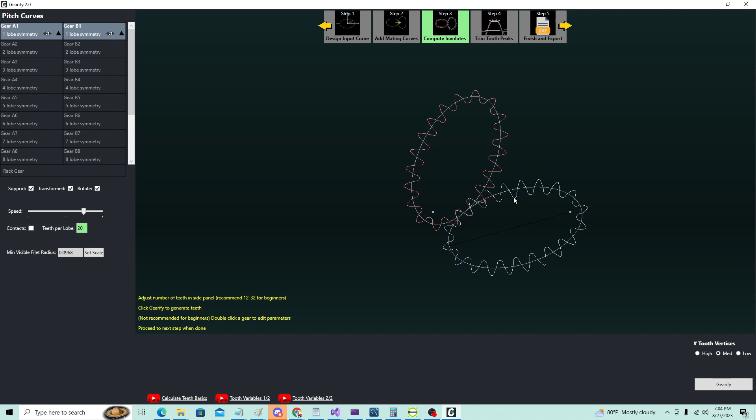But one thing I'm going to want to control for is, first of all, I want the gear to be the appropriate size, and I want to also make sure that the interior radius does not fall below that 0.05 radius dimension, so that you can mill it with the minimum end mill size that I have available. So I need to set the scale of this thing effectively before I can actually read or understand or make sense of any of the dimensions.

So I click Set Scale, and I'm going to use the default, which is the Ref1 to Ref2 distance. So basically that's going to be the axle to axle distance, and I want that desired dimension to be 3 inches in my case. Now, dimensions in Gearify are always unitless, so I'm just going to make it 3. And then I click Scale to Dimension. Okay. So there are different numbers of teeth I could use. The other gear assembly used 32 teeth total.

But notice now that I've actually set the scale, I can actually read this min radius dimension, and it's actually correct at this point since the scale has been set. Now that's too small. So basically, if I make it the same number of teeth as the last design with the axle to axle distance of 3 inches, it's falling well below my 0.05 minimum for the interior radius, because you wouldn't be able to get an end mill into these interior corners. It would just cut away too much. It would not accurately capture the design.

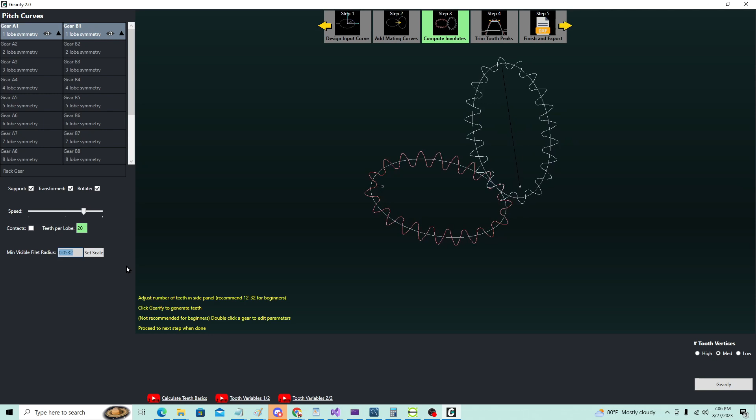So what I want to do is I want to increase the number of teeth so that each gap is larger. And I think actually 20, which was the default, may be a good value to shoot for. And it appears that it's correct, that 0.053, so we're above that 0.05 margin. So already it looks like we're in pretty good shape. So let's proceed, just sticking with all these defaults.

Let's proceed with the default parameters, and I'll try the trimming step because we gotta get rid of these interior intersections now. So I'll leave it at the fast setting because that's really good for prototyping and also for demonstration purposes. Probably would use standard if I was actually gonna produce this exact design. Now that looks pretty good, but there's a small problem.

Notice how the tips on the pointy ends were seriously clipped off, like massively clipped off, and the flatter end teeth not so much clipped. These are kind of more pointed, and these are kind of much more blunted, and I don't like that. First of all, I don't like it aesthetically, but also operationally I don't like it, because if you watch those, so I have the show contacts here, these green dots.

If you watch that right about this point here, you can see that here we are, right there. You see that brief moment, and I think it'll happen again at this point. Slow it down a little bit. You see when that point of contact drops off there. Now I have just one point of contact between the two gears, which is not good. I want at least 2 so that it's pinched and that it doesn't slip out.

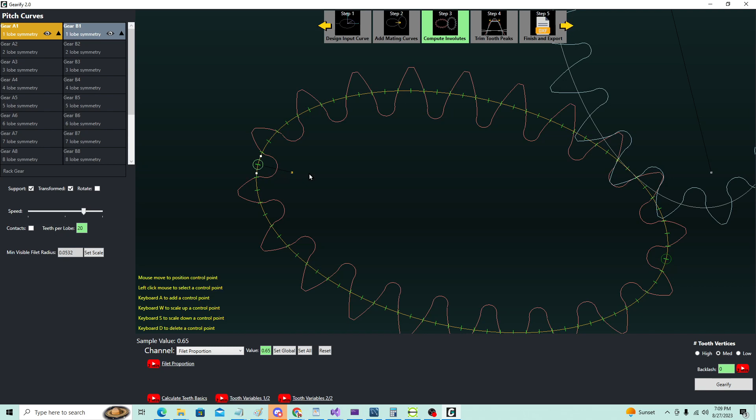So I'm going to use a fillet proportion of 0.65 instead of the original 0.5. Say set global, and then click Gearify again. And notice how those depths now increased after I changed the dimension and Gearified. Now I have a deeper cut there. And that's all well and good, but honestly, I really only need the deeper cut on this side. The cuts got a lot deeper on this end as well, and I don't hugely love the aesthetic. I'm fine with how it looks over here, but over here, this is superfluous because I already had plenty of clearance. So how do I handle that?

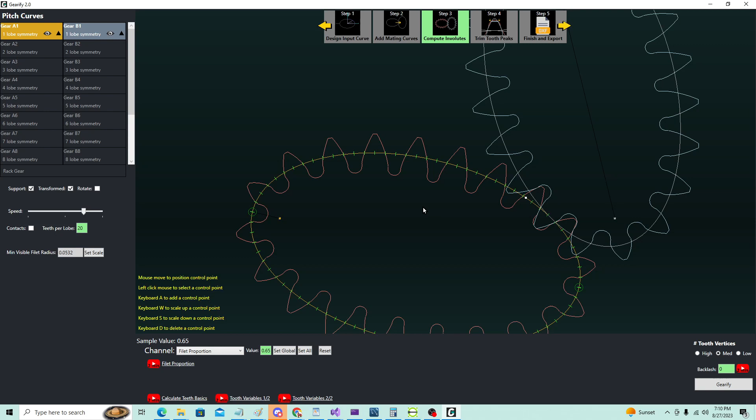So what I'm going to do is I'm going to add a control point here. I'm going to add a variation to it. Instead of being uniform, I'm going to control that fillet proportion. So over here, it's 0.65. Here it's 0.65, but I just added another control point, and I'm going to reduce that control point down to 0.5. So now if you look at that sample value along the curve, that fillet proportion varies from 0.65 on the ends to 0.5 here.

And I'm going to do the same thing with the other gear. I'm going to add right in the middle there, just add a control point. I'm going to reduce its value to 0.5. So then we've got that nice smooth variation. Okay, so if I did this right, when I click Gearify, you should see, if you watch right around here, you should see that jump in and be a little more shallow after the calculation. Perfect. Okay, yeah, it worked exactly as intended.

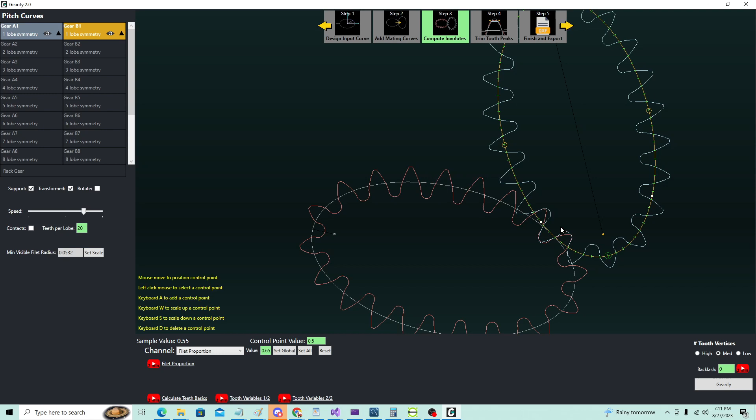All right, cool. So I've made these interior fillets deeper, so hopefully I get less shearing of these tooth tips at the pointy ends. So now that we're good on that, I'm going to say begin trim. And it does look a lot better. See, with the trimming, we have a lot less blunting of the tooth peaks. So much better, at least aesthetically.

But let's examine it now and see, actually, are we still getting enough contact between these tooth tips? And I'm going to just kind of roll this forward, and it looks like there might be trouble. I'm not sure if this is going to pass the test. See, we've lost it. So now we only have one point of contact right here. And even though that was significantly better, we have a lot less truncated tooth peaks, we're still missing some contact in that region back here. You can see when it drops off again. Yep.

Yeah, it's just not quite enough. All right, so now what do we do? Okay, we've improved the aesthetic and we've definitely made a little bit more clearance, but we're still not quite getting as much contact as we would want. So let's tweak the parameters again. You see when I go back, the trimming is removed, but that's okay. We can redo it in a minute.

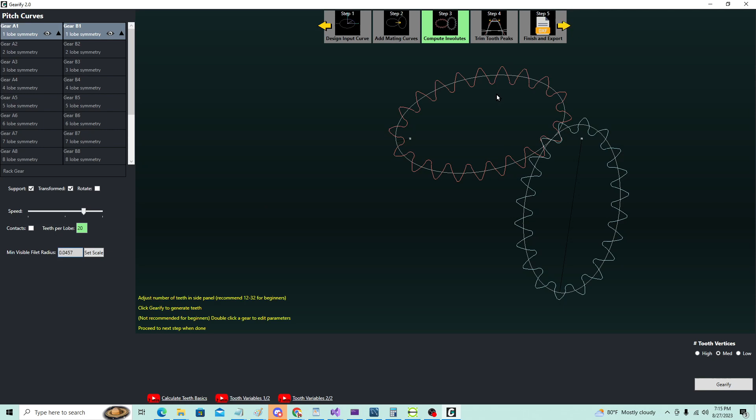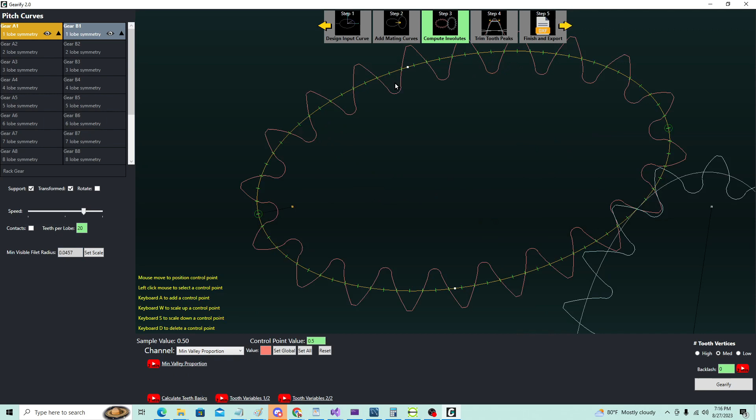and it's fallen below that 0.05 radius, which is in my specification. So these dimensions are too small. It's already too small of an interior radius to cut. Can I fix that? Well, there's a way to handle that too. So one of the parameters that I can use is go to min-valley proportion. Now this proportion actually controls how wide that gap is, and I can increase the proportion from 0.5 and make it a little bit bigger, and that gap will actually widen.

Notice how on this side the radius seems to be pretty big because it's covering that distance between the flanks, but it seems like here is more where the trouble is. But this is a minimum, so if I increase the minimum a little bit, these should be affected, but these shouldn't be impacted so much, assuming I choose the right value. So I'm just going to nudge this up to 0.55, say set global, and I want you to watch this interior fillet here after I click Gearify.

And cool, now those widen just a tiny bit, and now you can see that min visible fillet radius is now just above the specification, which is fantastic. So let's try rolling it again. And as I expected, it's still totally fine. I mean, all we did was increase the clearance a little bit, but it's still good to do this step just to double check.

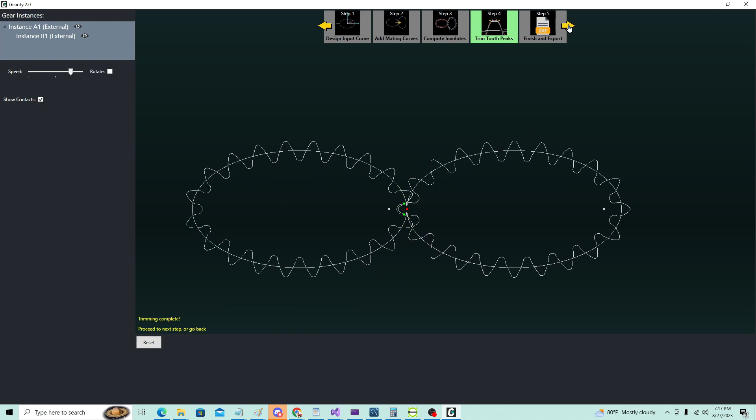Okay, so first thing I'm going to do here is I'm going to include my pitch curves. I'm actually going to use an axle diameter of 1/8 inch, so 0.125. So I've got those axle diameters there. And yeah, this is looking pretty good. So let me just get it into a position where I want the export to be. Let's stop it right about there. That looks good. And I'll say export. Gear Ellipse demo. Save. All right, and we've generated the design according to spec.

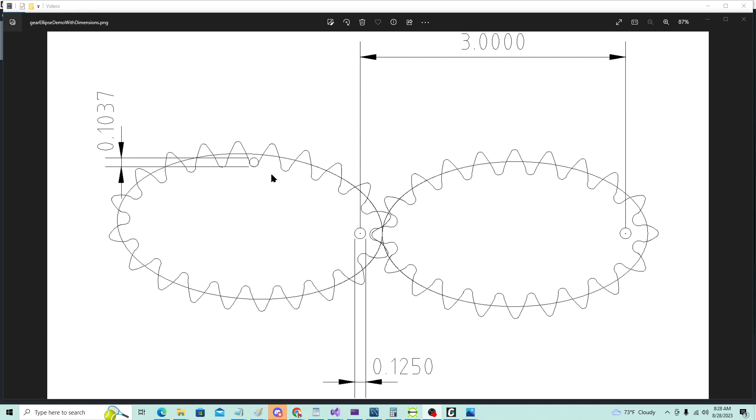So yeah, I hope that this gave you an idea of the power of Gearify 2.0 and how quickly you can design and prototype and check out the issues and make adjustments to the parameters and make something that is the size and spec that you want. So cool. Hope you enjoyed.